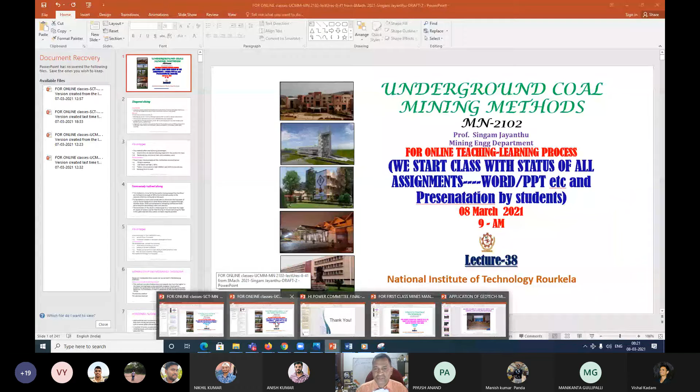Strata control - now I am making it full screen. So welcome to our lecture number 38, and we may need some more extra classes that your CR along with all your team, you decide yourself, as we did it.

Already I have shown you for our other batches - 3-4 hours, 3-4 extra classes were taken yesterday and Sunday, and almost part of that syllabus is completed, and all their assignments were also presented. Few left, that's all. Now we have been discussing about our strata management plan, which is also one of the very important issues to be covered.

Instead of telling any theory from the books just like that, I am giving you from some of the investigations in the mines, and we should know before that what are the objectives of the strata management plan - it is to measure and assess the pressure and convergence.

This is as far as our longwall mining. I told you that our future is longwall as far as underground coal mining is concerned, because you will be going into deeper and more deeper horizons. So when you are going in depth beyond 600, 700, even 1 kilometer, 1.2 kilometer, you are supposed to extract.

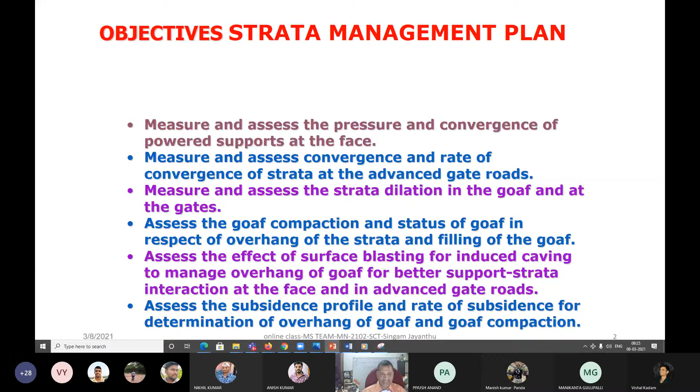Already you have seen why and how subsidence is supposed to be monitored on the surface. That is generally at around 30-meter interval we have some type of grids prepared, and then also beyond the barrier on the surface also, projection on the surface also we have to monitor, because when there is a subsidence, when it is a longwall panel, then the subsidence will not be vertically something like this.

There is a positive angle of draw where this subsidence on the surface, if it is a surface, so that will be maybe 10 degree, 15 degree, 17 degree, whatever. That is a range, and from the vertical you will be getting an angle of draw. So you are supposed to monitor subsidence beyond the barrier also.

Then physical observation of goaf and face to see strata support response at the face and the gate roads, and also to design the optimum support for advanced gate roads. Suppose if you observed by measuring load how much is coming on your design support, then in the future you will be changing that. Changing in the sense, suppose the support capacity or what you use is some X.

Since we are talking about the gate roads, about 50-ton hydraulic props are generally used. So there are hydraulic props, 2 hydraulic props, and over these 2 hydraulic props we are having a bar, or there may be so many types, even wire meshing and then rope bolting, resin bolting, even cable bolting, so many things. Just to understand, if there are 50-ton capacity hydraulic props you are using on the sides, both sides, then it is 50 ton throughout the life of that panel.

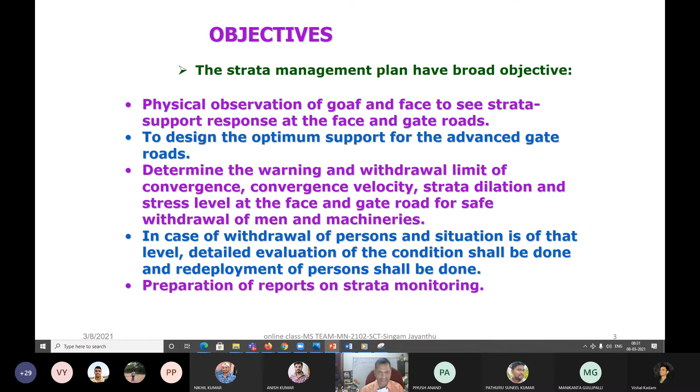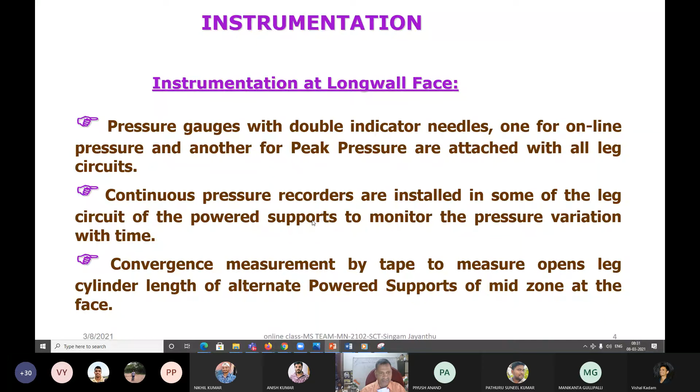For the purpose of strata management plan, a lot of instrumentation is required. You can see here pressure gauges, continuous pressure recorders, and convergence measurement by tape. There are many ways this is monitored, and you can also see some other instrumentation.

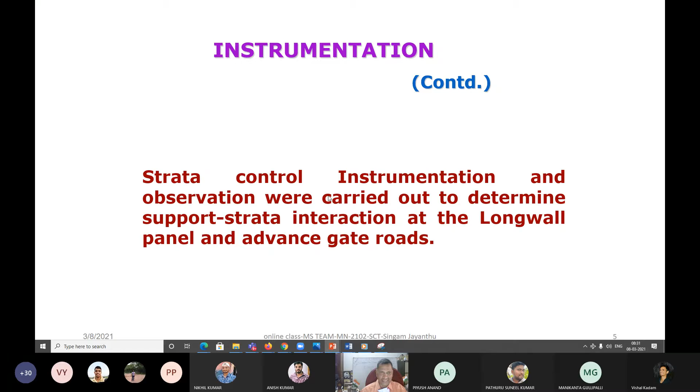Whatever strata control instrumentation and observations were carried out to determine support and strata interaction at the longwall panel and advanced gate roads in this mine, I will be showing you all the details here. Please note down the important points.

This instrumentation at the face included pressure gauges, both online and peak pressure, since there are many ways of collecting data—whether on Chinese longwalls or long panels from different countries we imported. There are different methods, and nowadays we also have online monitoring systems.

We are also working with our group on transdisciplinary, translational, industry-oriented research and academics—TTIORA, as I already told you—along with groups in computer science, electronics, and others. Since 2006 we have been trying to develop these types of systems. Shortly you will see results aligned with Make in India, Startup India, Stand Up India, and NEP 2020.

Then there's pressure experienced by the powered supports, which over time must also be monitored, along with the advanced gallery and gate roads, using different types of instruments as I have shown you.

There are load cells to understand changes in strata load, and convergence indicators, which can be measured in different ways. That's why I kept some of these instruments here itself, so it's easy for you, and for me, to show during discussion.

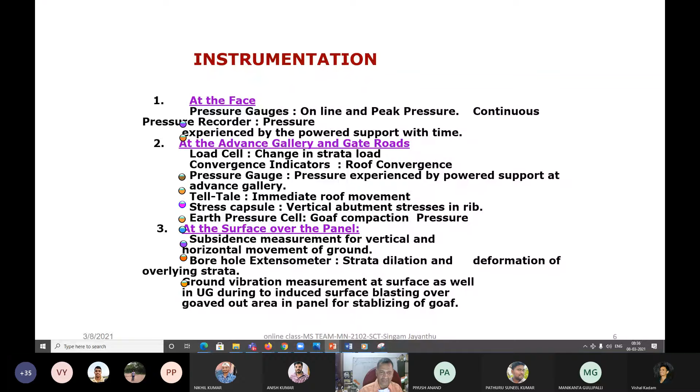I was presenting in some international webinars, and yesterday also, giving a type of coaching or technology exchange program to first class mine manager aspirants, along with directors and other senior officials, including the Director General of Mine Safety. I was showing all this information as well as strata control technology to those who passed first class and are appearing for the oral examination within a few days. There also I explained all these things.

And then for monitoring, what we are doing is reading from pressure gauges which are already fitted, installed, and commissioned, of different types. In this mine, there are indicator needles, one for online reading and other for peak pressure, taken in each shift.

In the majority of cases, in the beginning also, when we introduced this, whether it is in GDK 7 Incline in Singareni Collieries, when we were working with our beloved Professor R.D. Singh sir, back in the 1980s, from that time itself we are still maintaining records such that in each shift they take readings in a bound page record book, maintained in addition to whatever online data or soft copy is available.

In each shift, during normal pressure and weighting periods, readings are taken with reference to the system pressure, with respect to the face advance, its time, date, and shift. Simultaneous load and convergence measurements are also taken at the gate roads, and automatic pressure recorders are provided in an adequate number of powered supports to monitor the continuous pressure profile of these leg circuits.

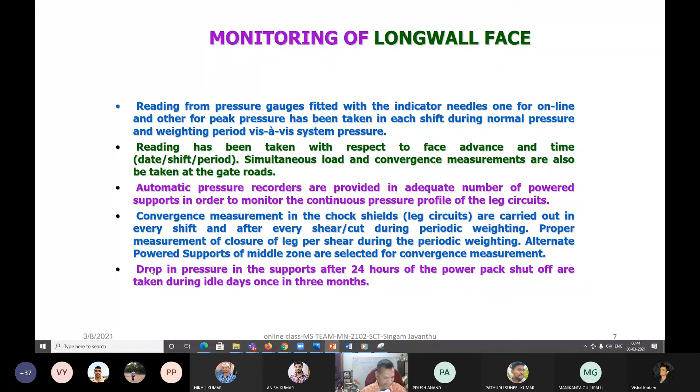Then drop in pressure in the supports after 24 hours of power pack shut off are taken during idle days, once in 3 months. You must have understood this, and this is your CEP question - why this is taken, what is the requirement of doing this. This is your CEP question, my beloved students.

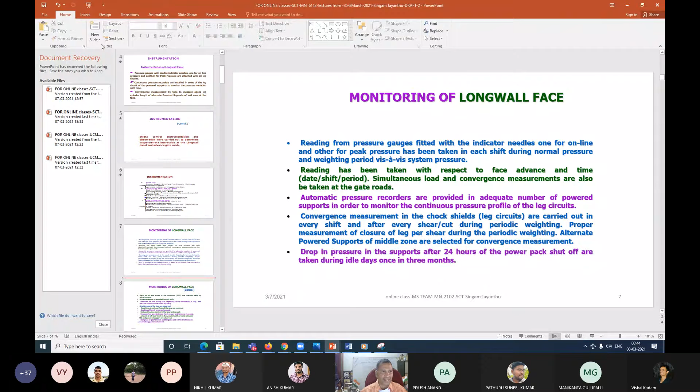And now anybody can unmute and tell me who is ready to present, regarding extra classes and all those things. Why is the following required - drop in pressure in the supports monitored after this? Why is it required? Why should it be monitored?

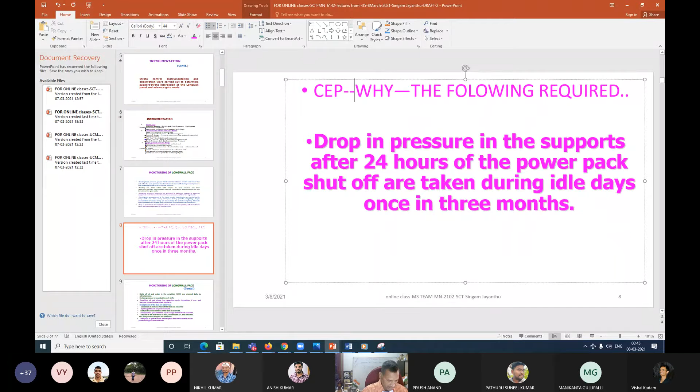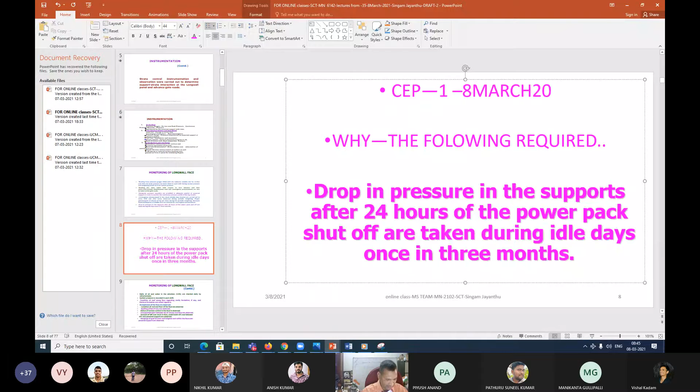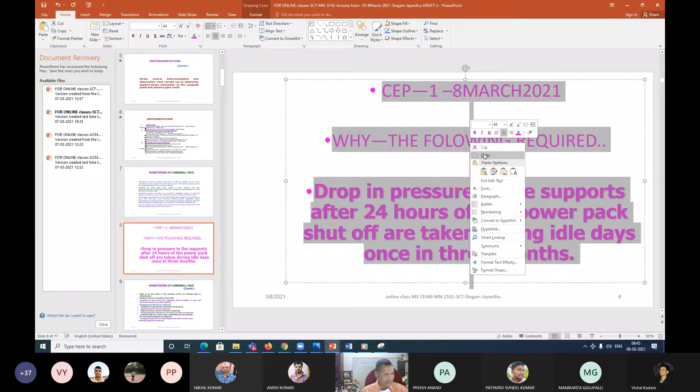No, you first give the total gist. These are the total number of students, 64 till now. This many have presented, and all these PPTs and YouTube links are available with you, or not available? 10%? Yes, 20% available.

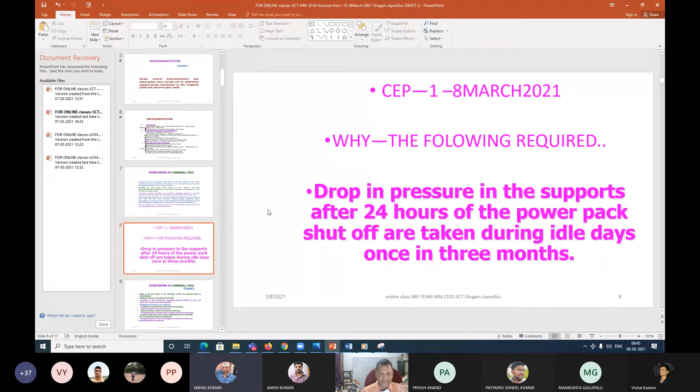All the lectures are uploaded to YouTube. You hear me first, and all these things you should be in a position to explain.

I am taking attendance so that everybody will know where they stand and their sincerity, or whether they are fit to learn something more, or that is sufficient. Otherwise, if somebody doesn't want to learn by rote, anybody...

With pleasure and with interest, people should learn. That is what is our Atmanirbhar Bharat. The skills should be developed with that spirit, and that is the spirit behind our assignment and learning-based topics for everybody.

So the total number of students, now CR should be able to say what are the total number of students, how many already presented in each class, how many extra classes are required, and in consultation with everyone they will decide. I am ready anytime, even at 12 midnight or 12 noon, whatever you like.

Now I downloaded once again. You coordinate. Any doubts first? Any doubts? No doubts, okay. And see the answer. Okay, no problem. Now continue with CR.

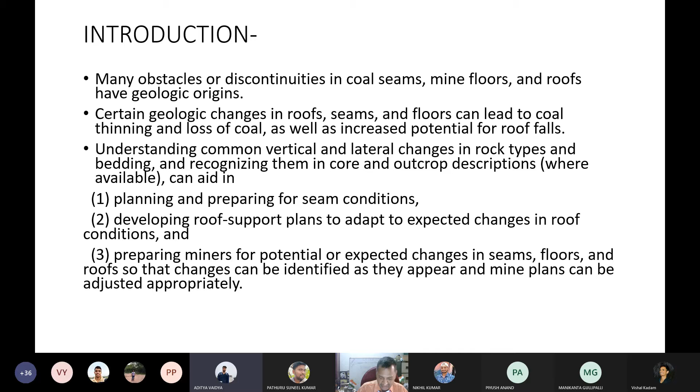Continue. Okay, sir. So some of the discontinuities I have mentioned here are splits, partings, weak shells, kettle bottoms, coal riders, slips, locks, etc.

Let's start with the first discontinuity, that is clay veins. Clay veins are formed from clay, from roof or floor sediments, mobilized into tension fractures in the seam. The trend is that they are difficult to predict, and the potential roof hazard is that the roof quality gets almost completely deteriorated. As you can see in the figure, I have marked the clay veins in yellow color, which generally get inserted into the tension fractures. To mitigate this, proper roof support is done via bolting, blocking, and strapping. The roof support depends on orientation of ribs, density, and height of supports.

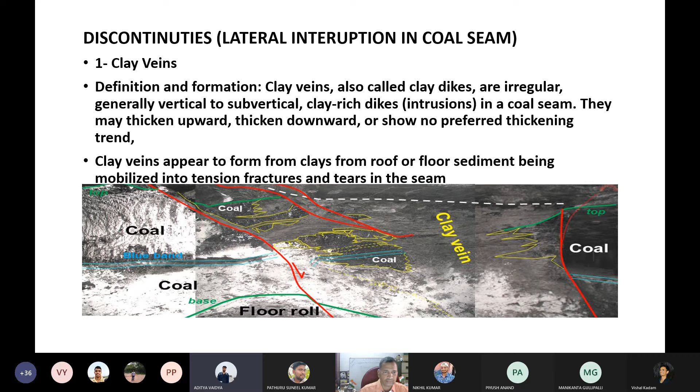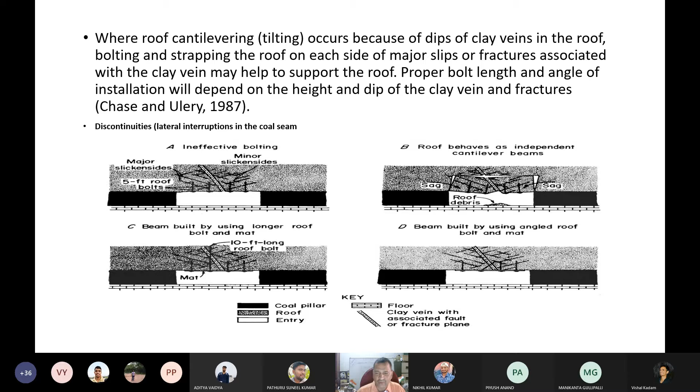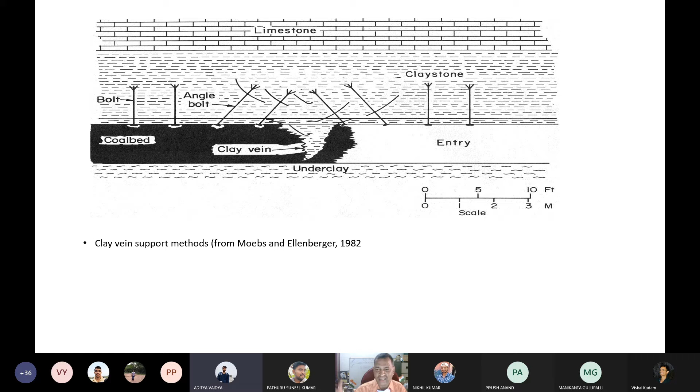Next, we move to coal balls. At this point, I would like to remind you that you should not explain what was already covered in the class. Number one. Number two, the figure reference, this is not the style of giving it. Any figure should be self-explanatory and have a proper title, and if it is not drawn by our students or scholars, it should have a reference, not written like this. What is the meaning of 'from Moebs and this'? 'From' is not required. Write 'clay vein support method' properly, whatever it is. That is also one style, but we should be consistent, not have one side with a bracket and the other side without. Are you able to see, Aditya? This shows how poor your skills are in preparing slides. I wish these skills should be improved as part of Skill India, Make in India, Atmanirbhar Bharat, NEP 2020. Continue now, this is for everybody, not only Aditya. Right, yes sir, I will improve it next time, sir.

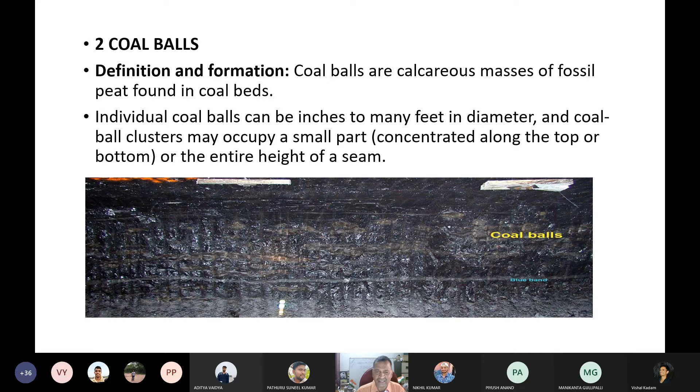Then the second one is coal balls. You skip those which were already covered in the class. Say something latest which is not covered in class — that is the mission of our learning-based assignments. Continue, say something new, keep within the time, 6 minutes whatever. And all other students should ask questions based on whatever latest information is provided by our students and scholars. Continue.

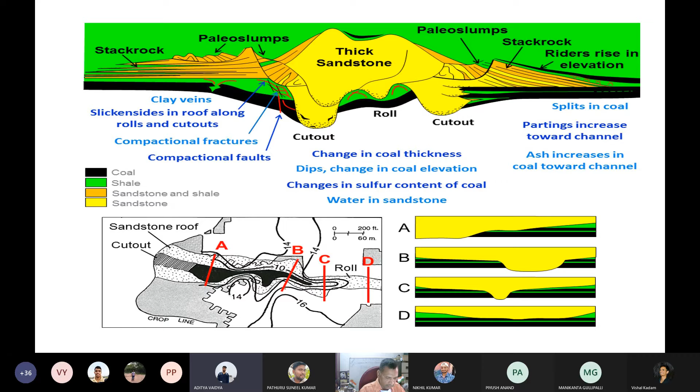The potential roof hazard is that the roof falls lateral to the cutout channel or beneath the roll in the roof, which is a safety concern. Roof fall is problematic where sandstone rolls and cutouts are superimposed on other weak roof conditions such as coal riders and clay stones.

Aditya could not even maintain proper uniformity in the slides. He simply copied and pasted from somewhere. This is illegal, something like someone eating chicken and taking it out from his mouth after it went into his stomach, then eating it again. That is an illegal and unethical thing. You should not do that.

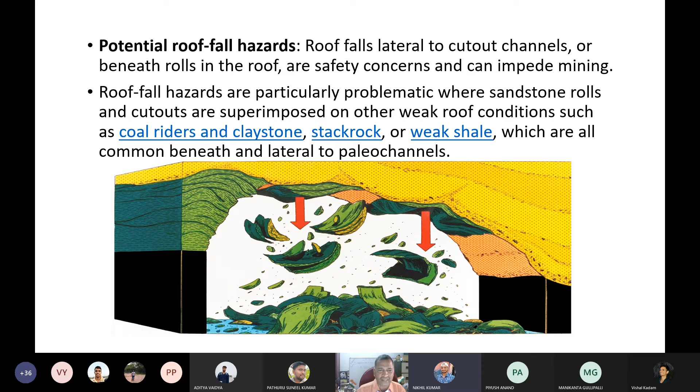Okay, continue. Sir, it's already 8 minutes for Aditya, sir. Then go to the conclusion. Be okay, within the time.

Whatever I was telling in between, I already told it long back so that others will understand and learn these skills in their lifetime. That is the mission of whatever we made, not just to collect material as a memory builder. Those people will be useless and thrown into the dustbin unless you understand the problem and become the problem solver, whether it is preparing assignments or dealing with strata control problems, as well as strata control technology.

Go to the conclusion and explain. Sir, this paper is confined to roof falls, so how should the conclusion be written? He has simply copied and pasted. He should be repeated. Note that down and go to the next.

This is zero marks. He could not come above the fail grade. Zero. Go to the next.

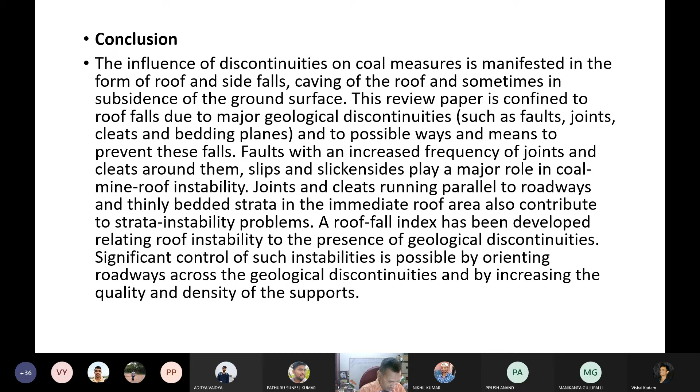Continue. Other things I have already written here. No latest reference, unable to say about any international journal. He did so much work for these 2-3 months, but that means if he is a strata control engineer in the mines, he will be disastrous. He cannot help his manager, the management, the industry, or our country. They are useless people; we don't encourage them.

Continue with the next. Once your slides are visible, go ahead. Note it down as to be repeated, otherwise zero for these marks, whatever midsem and TA.

Next, number 2. I can also skip saying these things and directly evaluate, and this is the way we will be giving marks later, but I am giving some more opportunities for you to improve.

Continue. Good morning, everyone, my voice is audible? Yes sir, yes. Good morning everyone, my assignment topic was strata control cell in underground coal mines, so I will give a presentation on the same.

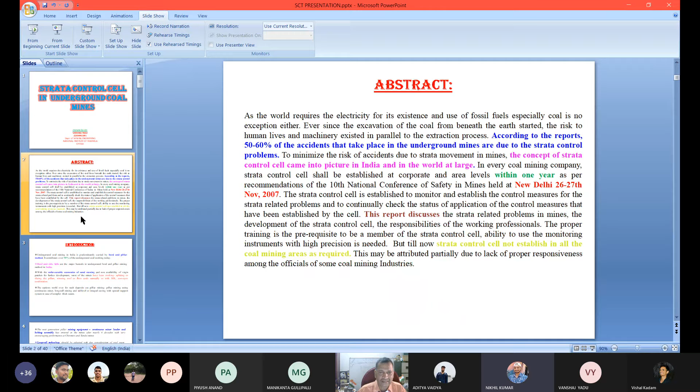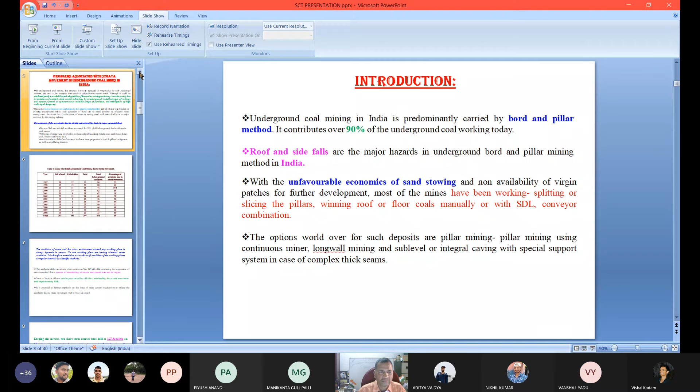So these are the problems associated with strata movement in underground coal mines. The analysis of accidents due to strata movement over the last 12 years revealed that roof and side wall accidents accounted for 59%. All types of strata were involved in roof and sidewall accidents: shale, coal, sandstone, shelly coal, etc.

So, last 12 years means is it 2008 to 2020? What is your reference? Is this data from you?

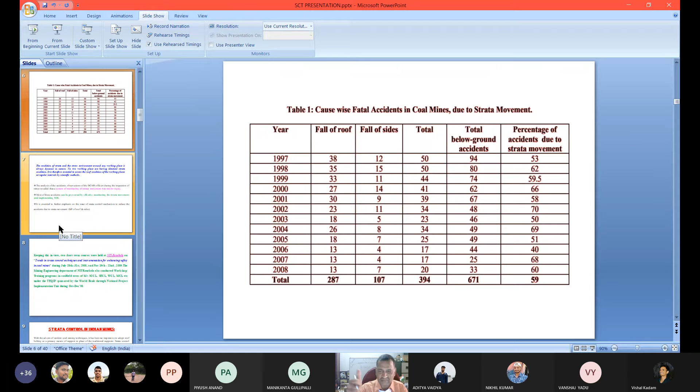Okay, then continue. Every time I remind this so it gets imprinted in everybody's mind, so that in future, in their whole life, whether they become chairman of the greatest company in the world, they should remember this. Whenever they prepare any figure, any slide, any table, any information, these are the minimum requirements. This skill we learn in NIT Rourkela as part of our Atmanirbhar Bharat, NEP 2020, whatever it is.

Continue and maintain the time. Now I'll stop giving observations. Continue. Okay sir, based on this only your marks will be there. That's what I wanted. I am telling again and again so that many people don't fail, as already happened in the previous semester. Many people failed. Continue.

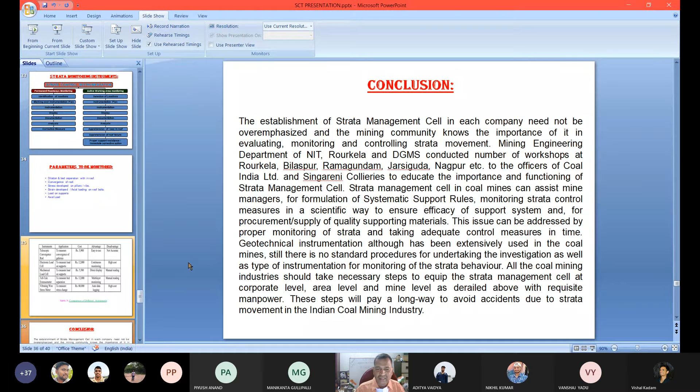Okay, so I think sir we can move with one more presentation today. No, one more is not now. Now you plan for extra classes also, and based on that, our next module and other things we will continue. Okay, and who will be summarizing today?

Summary by whom? Is there any executive PhD scholars present here? Of course, it is not mandatory. I told in the beginning itself.

Anybody summarizing today what we discussed? Are you able to see my screen?

Yes sir, yes sir. Very good, yes sir. So today we tried to know the strata management plan.

I also used to communicate to you, my beloved students, some international webinars, whether it is GeoLive, where in different countries about the ground control, strata control. Our NIT Rourkela was also a part of it, and you could have taken advantage of it.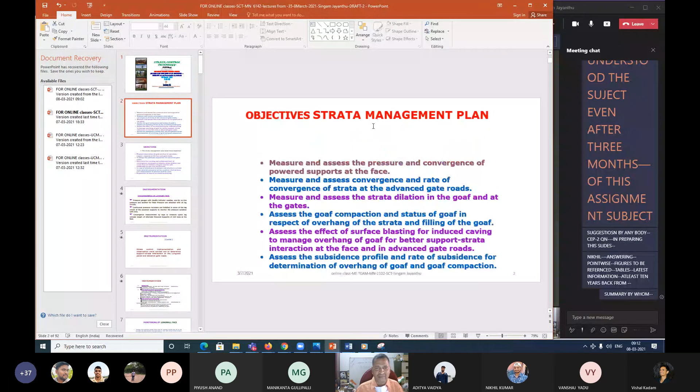Then also even yesterday, the strata control technology subject was discussed in detail by different directors and very senior officials from DGMS, Directorate General of Mines Safety. And there I have already shown you some other important issues that were discussed, their strata management plan and what type of instrumentation to be done with their objectives.

We tried to discuss today monitoring at the longwall face, and the CEP question nobody could answer. This question is carried forward as your homework.

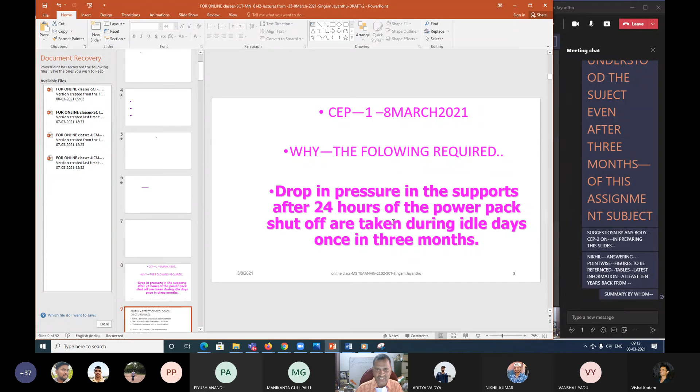You have to answer, we start with this answering, and then your additional classes when to be taken. And Aditya presented on geological disturbance, effect of geological, and he could not present properly, that copy-pasted material is to be discouraged and proper references should be given, and there was no latest reference, unable to say about any international journal which is there.

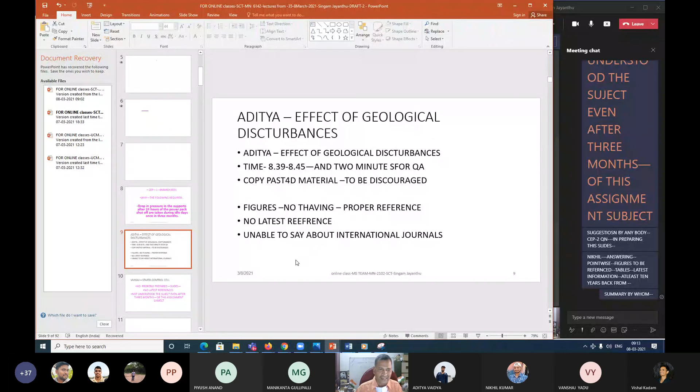But it is also part of the requirement for your evaluation, otherwise you are given 0 marks, somebody. Now the same thing happened in the previous semesters also in this online teaching learning process.

And Vansaj, strata control cell presentation, no properly prepared slides, no latest references, not understood the subject itself, even after 3 months of the assignment.

And I appreciate some of the students who also used to send their assignments to me, used to discuss with me, get some more materials and doubts. And of course, this is what we encourage from the beginning.

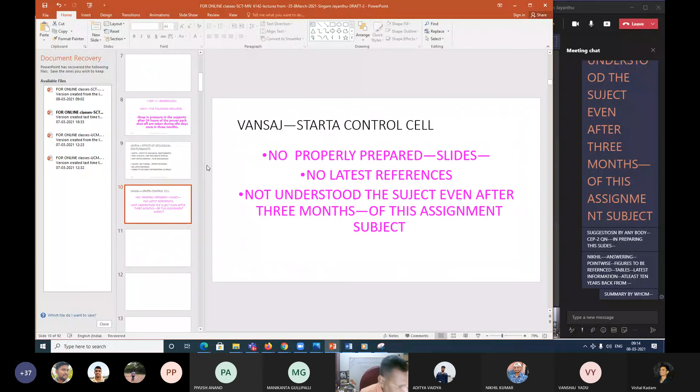And then what we do is you decide yourself along with all MTech and BTech, all scholars. And I am sorry if you fail.

So all these are being recorded, every information is there. There is no other way in online teaching learning process to evaluate. And some people already failed in the previous semesters in the final year.

All the best, and I hope you will come out with Atmanirbhar Bharat, Make in India, NEP 2020.

Now, for today, the lecture 35, you may be needing more than 6-7 additional classes for our other assignments as well as our other class materials to cover, to make you fit to be a strata control engineer, useful in our NEP 2020, Atmanirbhar Bharat, whatever the name you give.